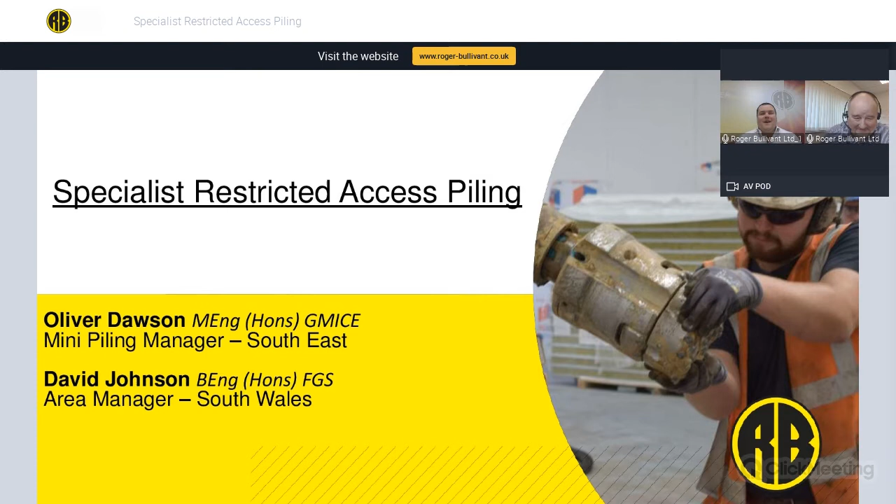So what we'll be talking about today, these are the topics: a little bit about our business, Odex piles, drill bar, jack down piles, slab underream, and then quite importantly, a question and answer session at the end.

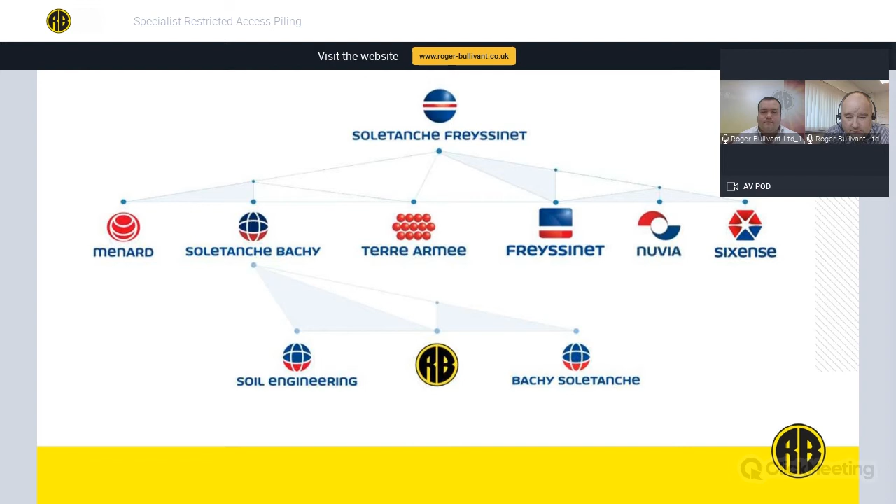Roger Bullivant ourselves, we operate out of 8 individual area offices throughout the country, and this gives us an advantage in that we've got local engineers with local knowledge, and that we've always got people available in your area. So if you need somebody to come out and have a look at your project and talk you through some things, which are the best options for your site, then we've got people available to do that.

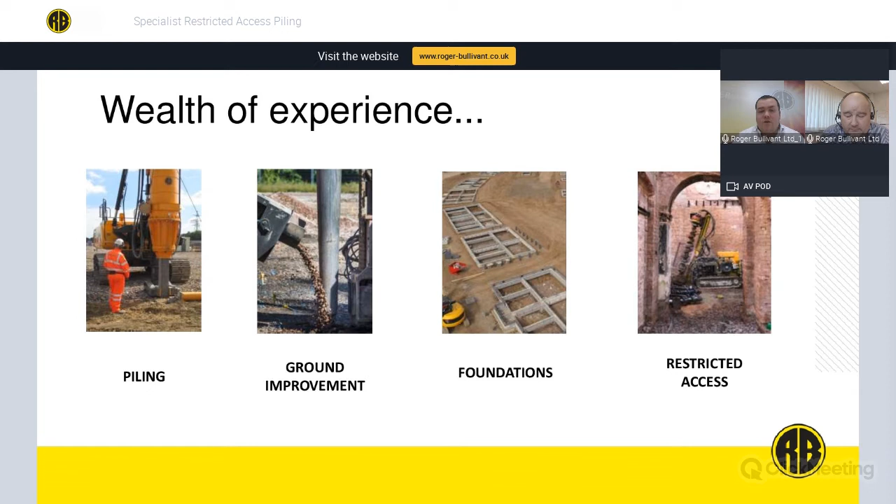And just some of the other techniques that we do, there are some webinars as well for these individual techniques: main fleet piling, driven precast, CFA, CHD piles, onto ground improvement, so vibro stone columns and dynamic compaction. Precast foundation systems to complement the piles that we put in the ground - we also have a precast system that can go on top to give you a full foundation solution. And onto restricted access piling, which is what we'll be discussing today and have been discussing in the previous two webinars, which is our smaller fleet of rigs for working in restricted headroom, restricted access.

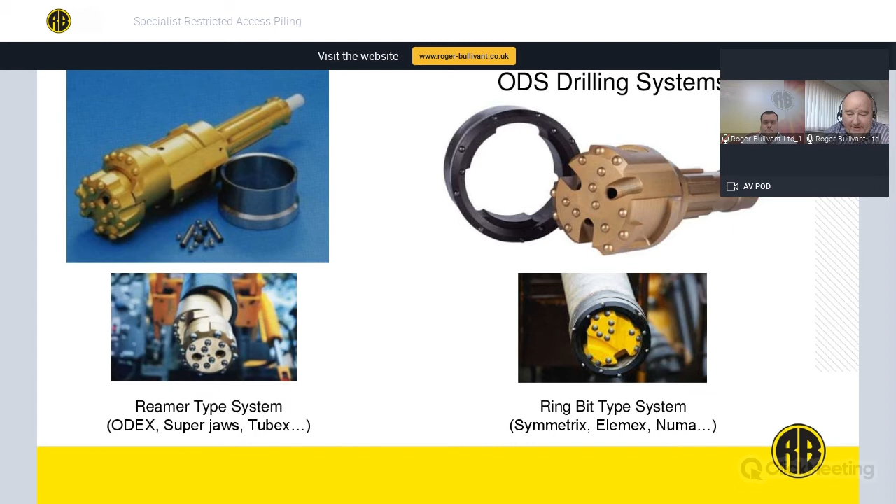But if we just advance forward, this is the basic installation of the Odex type pile, where we're taking a casing down behind the drilling system. So we drill into the ground and we rotate clockwise. We've got a hammer sitting behind the drilling system, and that will be giving the percussion to drill away at the ground, and the air flush clears the drill tip and brings the material back to the surface.

So we're drilling forwards, and once we've got into the rock and we've taken the casing down as far as we need to go, we then rotate the drill system backwards, which tucks in the over-reaming ring, and we can extract the whole lot back to the surface. We then go back down with a standard button bit and a DTH hammer, and we form a rock socket into the ground and fill that with concrete and with reinforcement. If the ground's wet, then we use standard tremie techniques, but essentially you're forming a pile socketed into the rock and cased through the overburden.

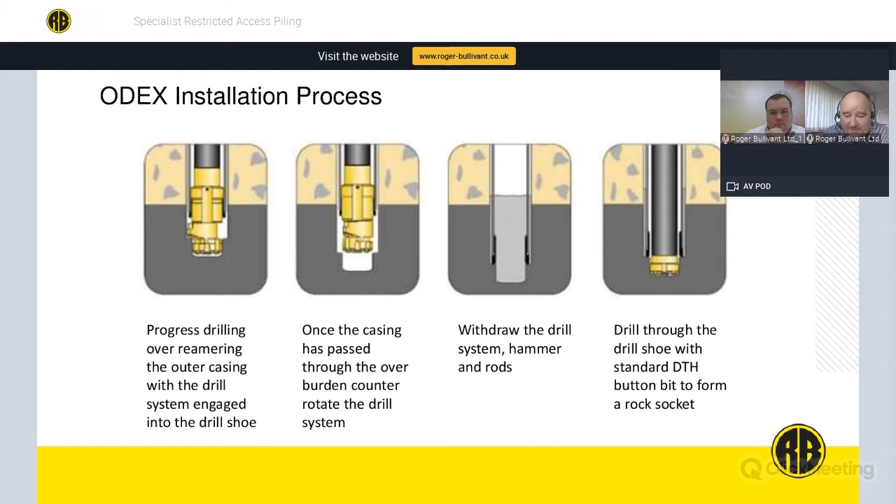This is just to show the type of machines that we use. Essentially, all you need to provide is rotation and a machine that has the capacity to lift the drill string back out again. So the deeper you go, the heavier the drill string, the bigger the machine you need.

This is a 6-inch Odex system with a mini rig, which will sit with a remote power pack. It's only got a 1 meter stroke, so it's quite slow to penetrate. It shows you that you don't actually need large machines if you're going to try and employ this technique in restricted access.

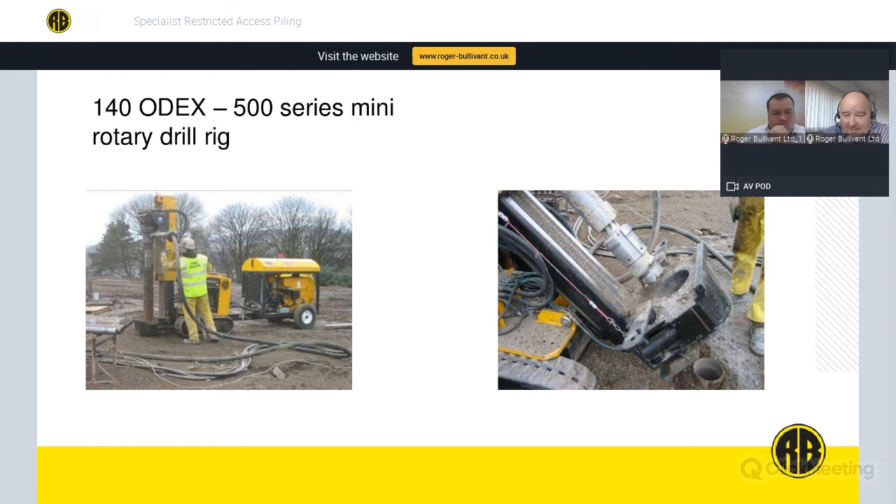Looking at the other type of system, Elemex is typical. Where I said before, the actual drilling system engages with the ring bit. So the ring bit and drilling system go down through the overburden into the rock, disengage, and come back out again. And you can see on that center photograph or the illustration, the ring bit which is left behind down the hole. They're several hundred pounds, so you could have a good specific reason to use this type of system.

And then once that's out, you go back down again, socket into the rock, and fill the hole with concrete and reinforcement. One of the benefits of the Elemex system is the way that it controls the airflow.

With the reaming system, the air tends to go into the ground itself, whereas with the ring bit system or the Elemex, it balances the airflow sufficiently that it cuts and it clears the face of the drill, but it's got a way of exiting from the face of the drill and back up inside the casing.

This is very important if you're drilling next to sensitive structures or anything where putting air into the ground might cause a problem. If you've got water-bearing sands, for example, you could cause liquefaction or disturbance to the ground. And mine workings is another example where you don't really want to be pumping a great deal of air into the ground if you're going to disturb ground gases and things like that. So there are subtle differences between the two, and we choose the right drilling system for the right ground.

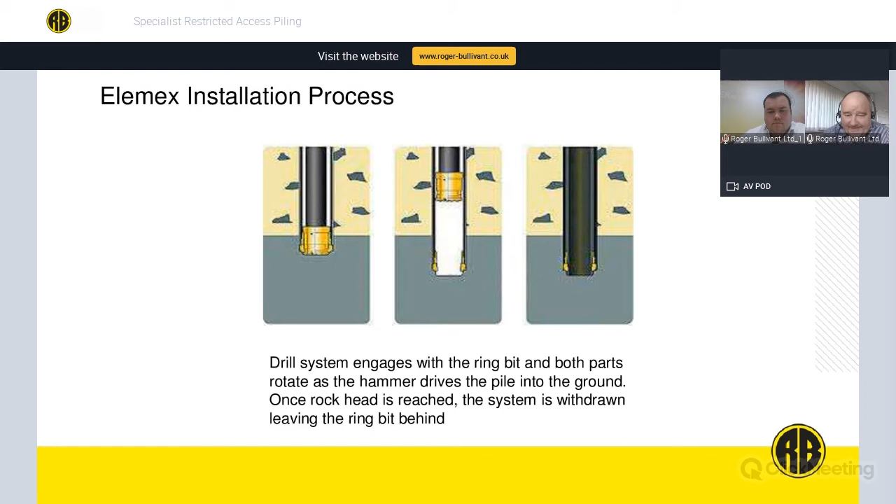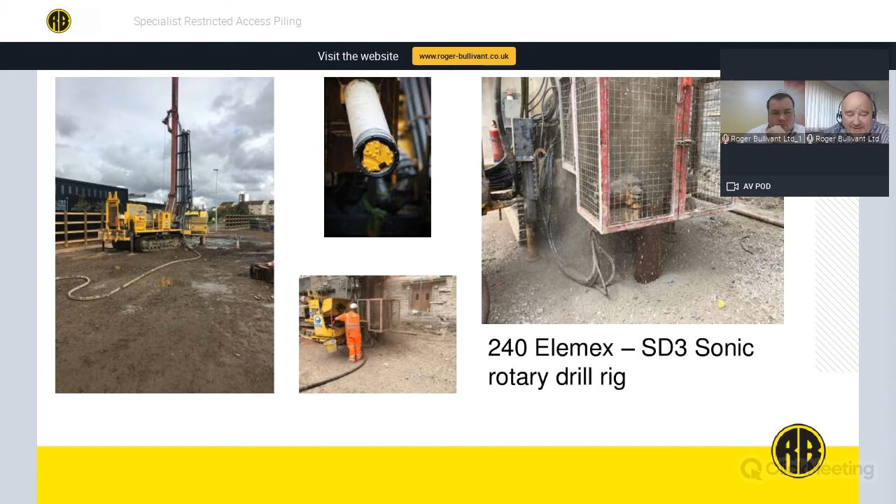Here's a little video.

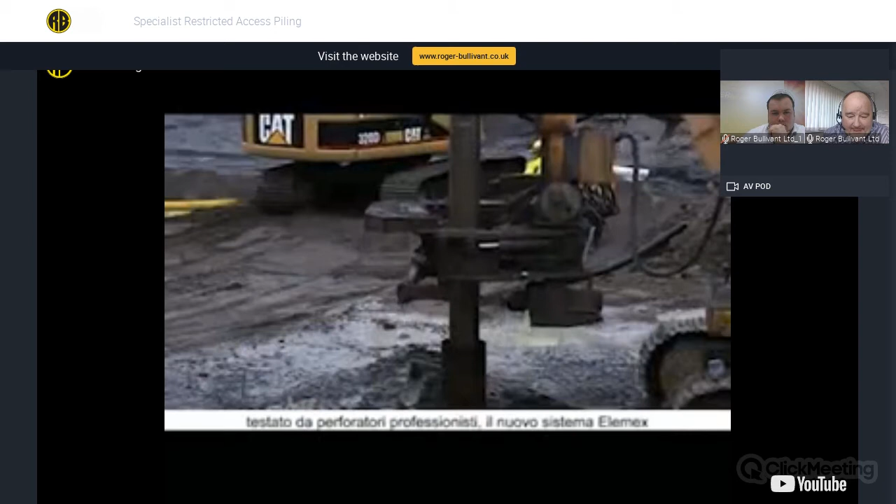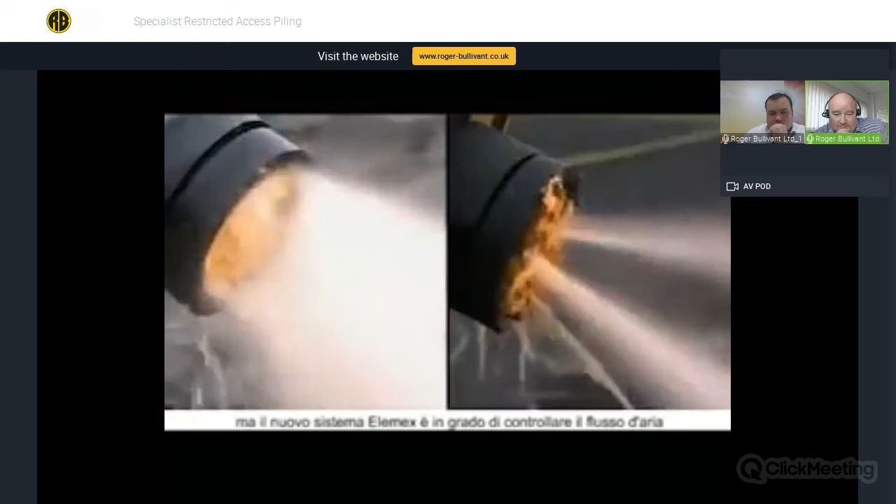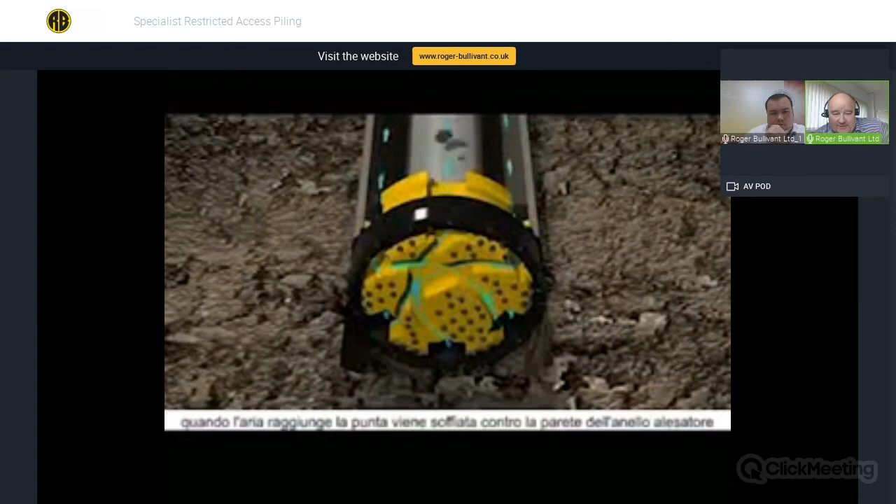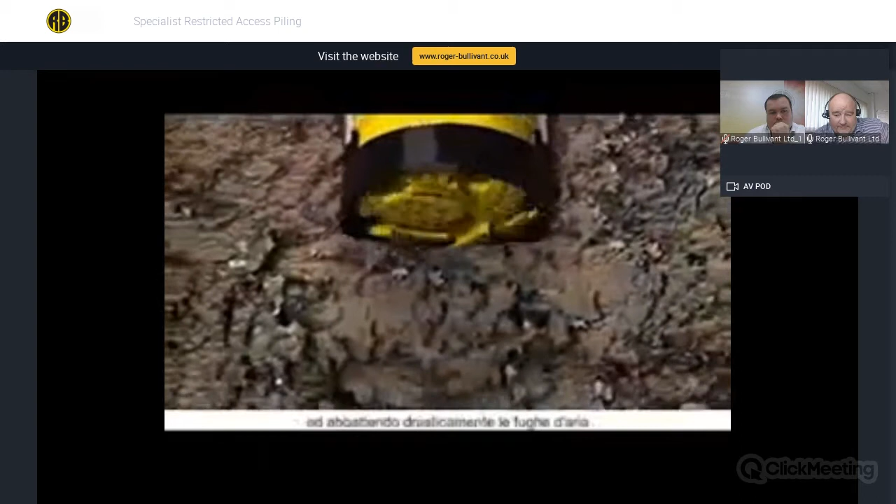Proven by seasoned drillers, the new Elemex system has revolutionized their way of working. Conventional down-the-hole drilling systems push compressed air straight into the ground. In clay, sand, or other sensitive ground conditions, this makes it hard to predict exactly where the air will go and how it will affect the surroundings. But with the new Elemex system controlling the airflow, the difference is obvious. It controls the airflow across the face of the drill bit. The redirection of the airflow is what makes the Elemex system unique. Once the air reaches the bit face, it's blown against the extended ring bit walls and is redirected to flow across the face. In this way, the air pressure is decreased just enough to allow an efficient flushing of the bit face without escaping to the surrounding ground.

Right, I think we're back again. Thank you, that was Odex piles, or drill and case piles.

Moving on, we've got a similar type of pile in that it will penetrate through hard ground and it involves percussive drilling. But this is what we call drill bar piles, where we don't need a casing to hold the side of the ground open. We're using a grout flush, and we're using that as a support fluid to keep the sides of the hole open.

Now, these have been around for a while, and they're called various different things. We call them drill bar piles, but they're often called self-drilled micro piles. It's the technique used for soil nails and rock bolts, or even anchor piles. Where you've got to be a little bit careful is they have got good tension capacity, but you have to look carefully at the code if you're going to start using them as British Standard or Eurocode anchors because of the double corrosion protection. So there are ways around it, but you've got to look at your specification for anchors before actually using them for that pure purpose.

Essentially what you've got is a long drill bit, your percussive hammer sits on the piling rig up above, and the drill string becomes the reinforcement of the pile. So you've got a continuously threaded bar with couplers, and it's a hollow bar. What we do is pump grout down through the center as we're hammering on the top, and that will flush the cuttings and the arisings back to the surface.

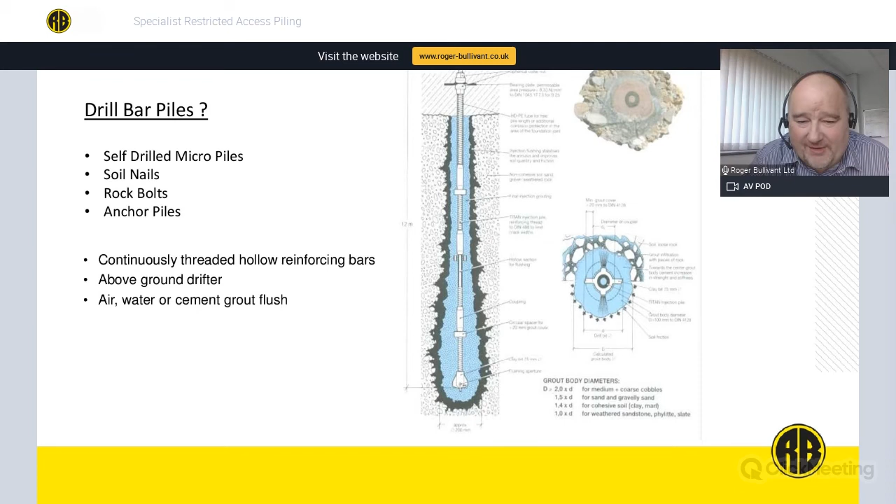You can mix grout with water and have a weaker grout, and in the right ground conditions, if you've got rock, you can introduce air. But essentially it's going to be grout or some sort of support fluid just to keep the hole open. The drill bit as well is a one-use drill bit, so you'll be careful in your selection of your drill bit because they're designed to go down the hole and just be left there.

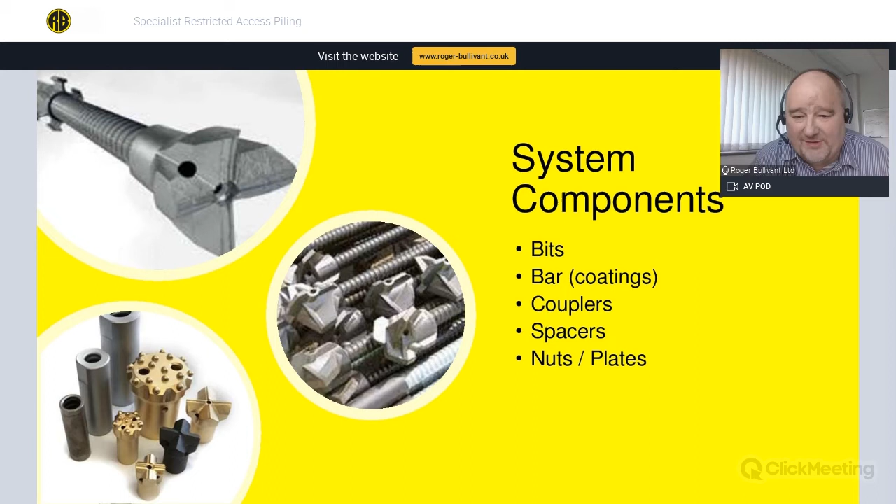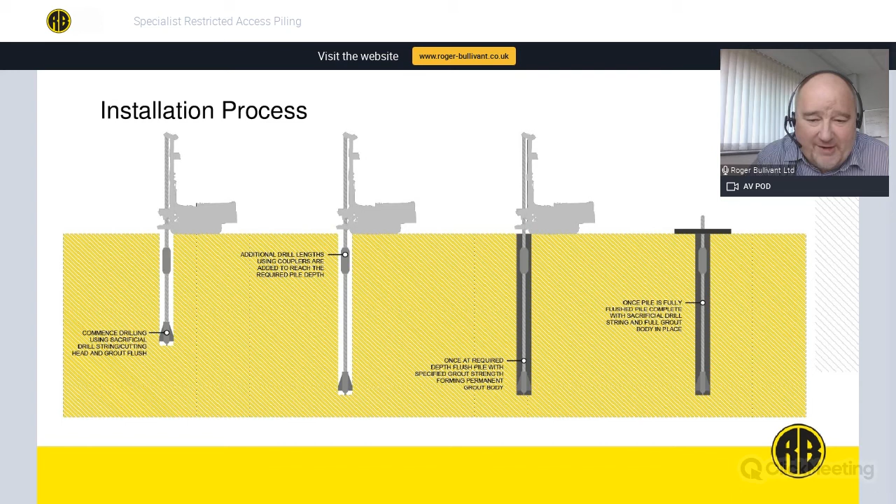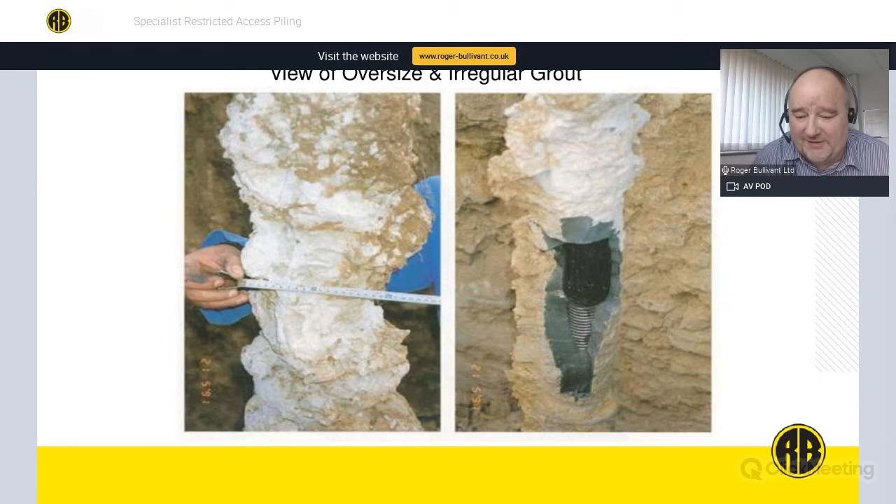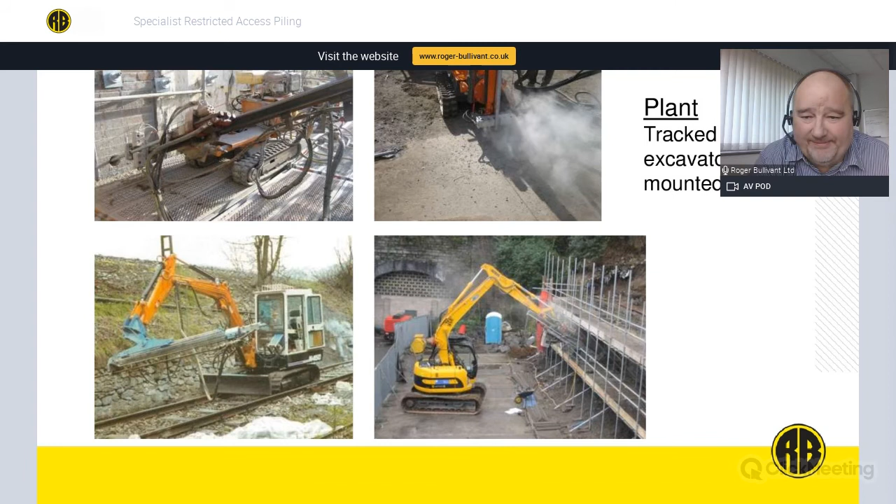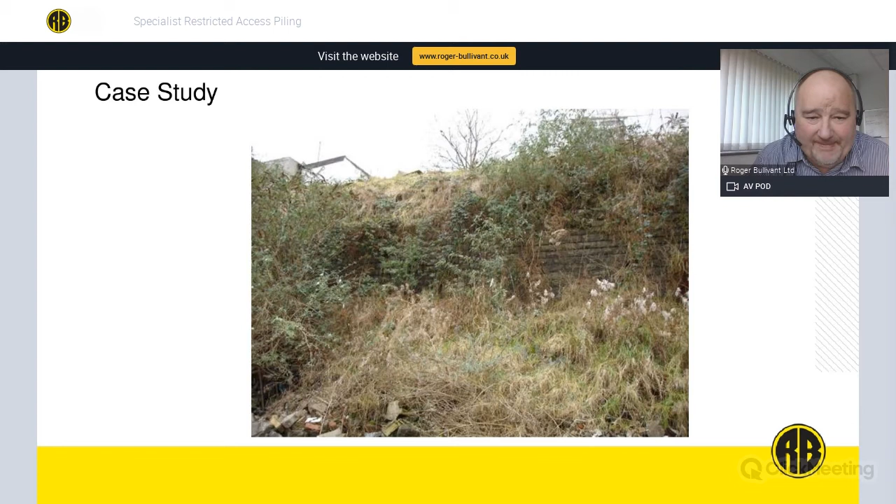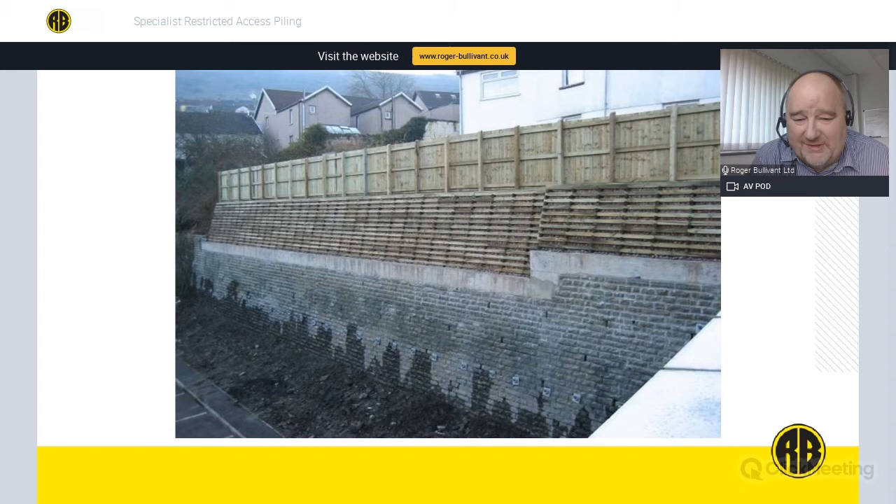And there's the finished job. So I was quite pleased with that - it came out really well. But it just gives you an example of the sort of things that we can put together. And in this sort of specialist, restricted world, it's more a case of presenting the challenges, and we tailor our systems to come up with solutions to people's problems.

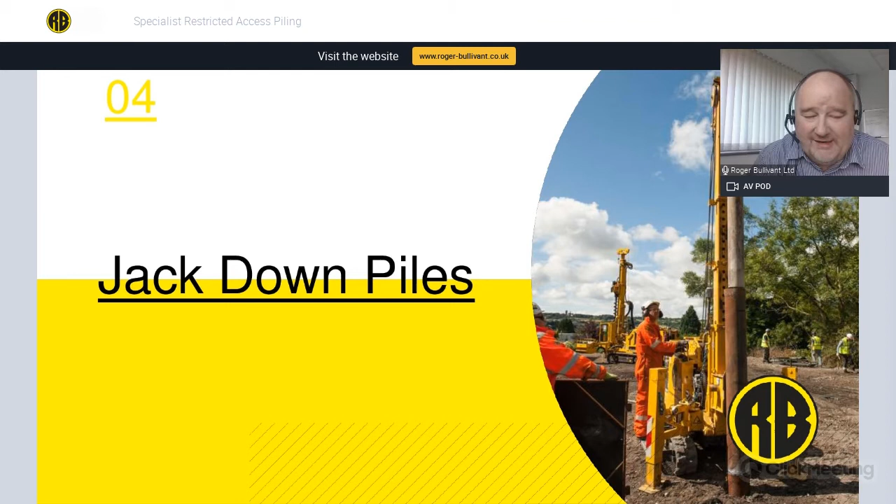Our third technique that we look at today is what we call jackdown piles. It's a relatively simple technique in that it involves pushing something into the ground, be it precast concrete or typically steel tubes, using a pair of hydraulic rams. It's completely vibration-free and silent, so we can use it inside buildings. We get very high capacities with these rams, up to 1,000 kilonewtons.

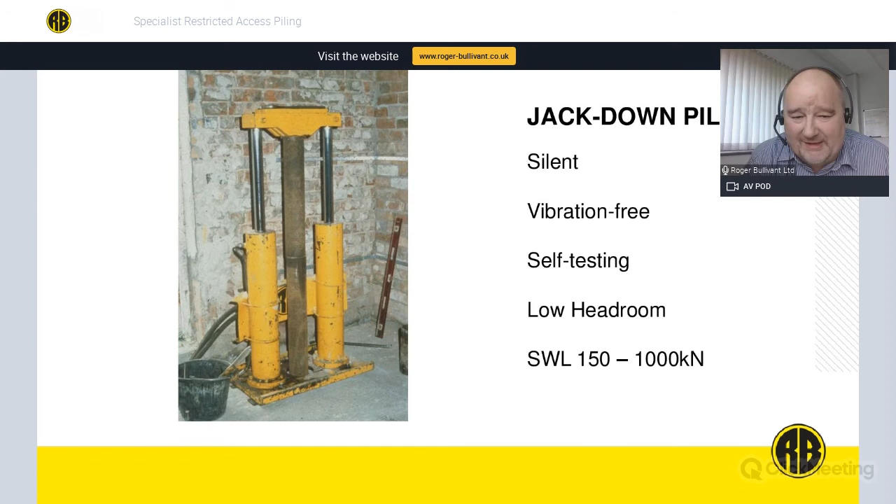And it's self-testing - we tend to use load cells. So as we're jacking the tubes into the ground, we'll introduce a load cell and we'll hold the load, a bit like a static load test, but not necessarily for quite so long. But we're proving the pile capacity as we're installing them.

One thing you've got to provide is a reaction. You can do that using water tanks, pallets of blocks, or typically on underpinning situations, we use the structure itself.

This is an example of an old historical structure where the front gable wall had moved away from the body of the building, and it needed underpinning but tying back in such a way that we couldn't use typical percussive piles, and we didn't want to undermine the foundations. So we went for a jack pile solution, which involved putting in a new slab and gave integrity to the building before we then installed the supports.

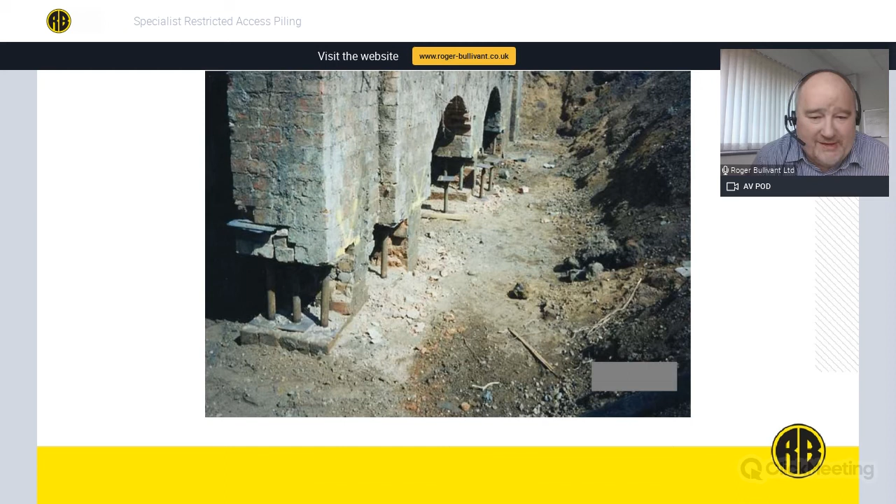We went in and needled into the walls, taking out the brickwork pockets, installing temporary supports, and then fixing reinforcement into the needle pockets. We fixed the slab and a downstand edge beam.

The edge beam on the jack pile system has to be reinforced upside down and the right way up, because as you're jacking, you're imposing forces and bending to the opposite way to what you have in your permanent condition. Now you'll see there are 3 steel tubes. They're tapered steel tubes, taped over at the top. They are to facilitate the jack piles after we've cast the slab itself.

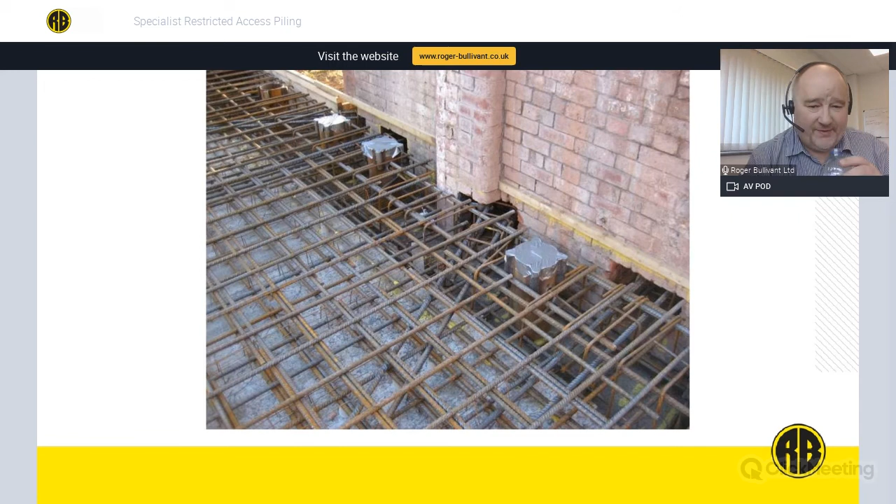Steel tubes come up through the reinforcement. We've got some couplers welded onto there, and they sit proud with the top of the concrete, so they sit above the reinforcement there.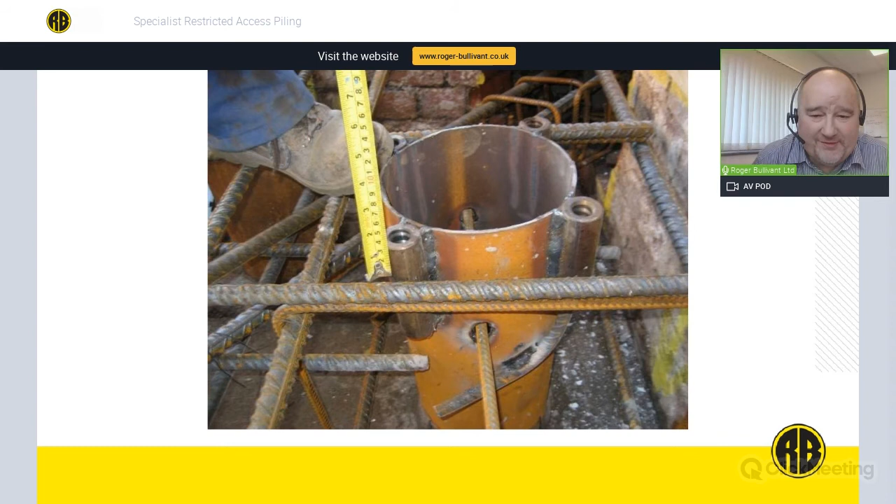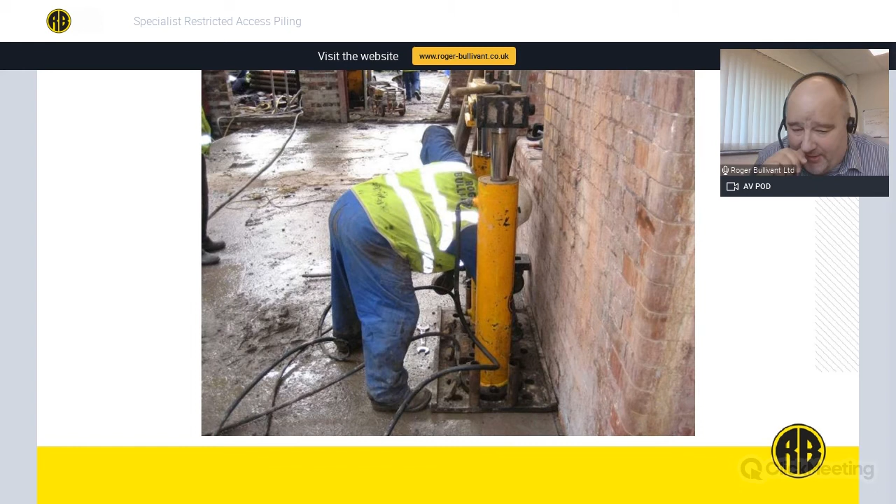The wall to the right is acting as kentledge to hold the whole system in place. Once we get down to depth and we've tested the load capacity, we fill the tubes full of concrete, and those tapered steel tubes then anchor into the slab.

There's a little case study here, final one for jack piling. This is in Hereford, if anybody knows it. It's an Edwardian facade on a building which actually encompasses a Tudor timber framed building within it. It's very odd, and it's built over the old city moat.

So there's the plaque on the outside. Now down in the basement, Barclays had a problem in that the vaulted old cellar was starting to collapse. They'd been repairing it over the years and it was continuing to creep. The ground was going down and the arch was springing. So there was quite a lot of dilapidation.

We had access problems in that the only way down there was downstairs behind the tellers. We couldn't have any vibration. Ventilation was an issue - it's quite sticky down there. So we had to come up with a bit of an innovative solution, and as you can see, the headroom was quite a challenge.

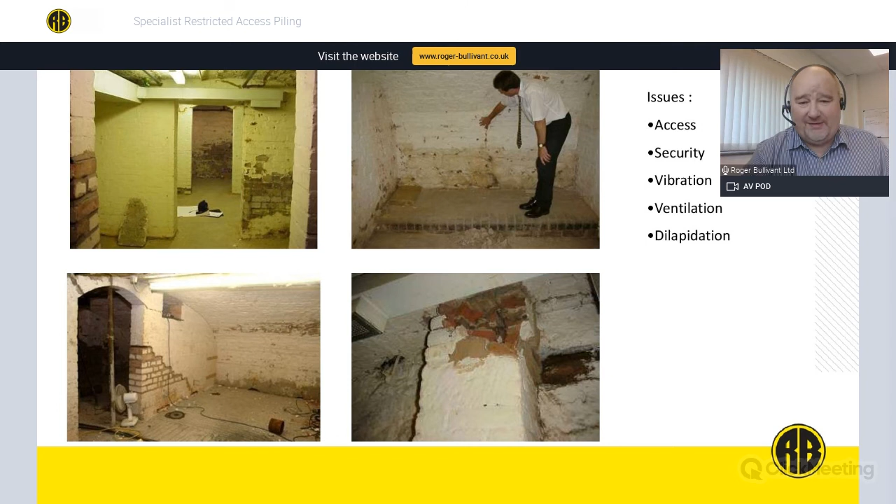What we came up with was a jack pile solution where we cored a hole from one of the upstairs lobbies down through into the basement. And that's how we got down the reinforcement and all the concrete for the slab.

And then we built ourselves a bespoke electric jack down rig, which was silent, no fumes, and that could pump 120 kilonewtons maximum load, using the building itself as the kentledge. The lowest part of that sprung arch was at 1200 mil, so we could only use very small strokes, sort of 6 inches at a time, to push the tubes in.

So we were using shims and pieces of steel roll sections just to facilitate the jacking. But that went really well and allowed us to support what potentially was quite a dangerous building.

Right, our final section today. This is basically a case study of something we've recently done in a brewery where we've got a warehouse where the client wanted to increase the loading on the floor by introducing a computerized racking system. The racking system is 40 meters tall and it's full of beer, so it's very heavy.

So the existing pile slab couldn't cater for the increased loads. The client didn't want to take the floor slab out and start again. He wanted a more cost-effective solution of upgrading and increasing the capacity of the floor slab.

Now, when you put piles in through a floor slab, conventionally, before you put the floor slab on, an efficient way is to put a pile cap on top to increase your shear perimeter, or to put a flared head. Now, what they wanted us to do, or the design for the new piled slab, was a 1300 millimeter diameter enlarged pile head, but we had to do that through a 400 millimeter cored hole. So we had to find a way of actually under-reaming under that slab.

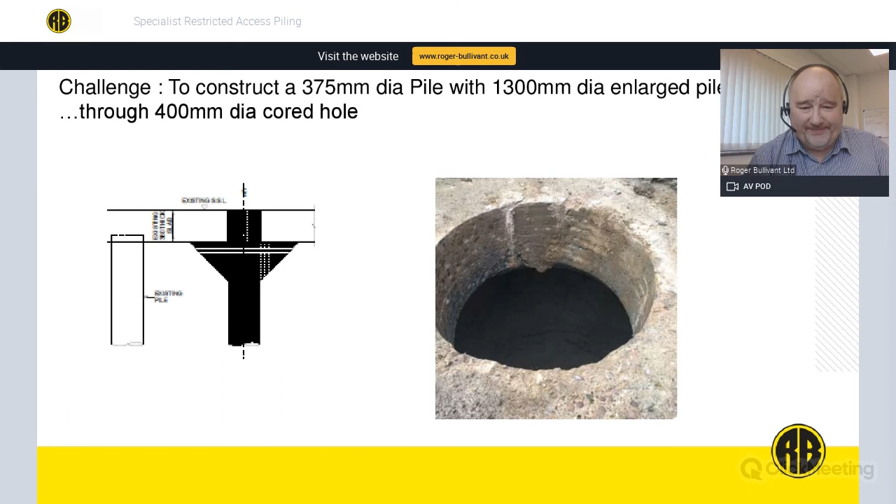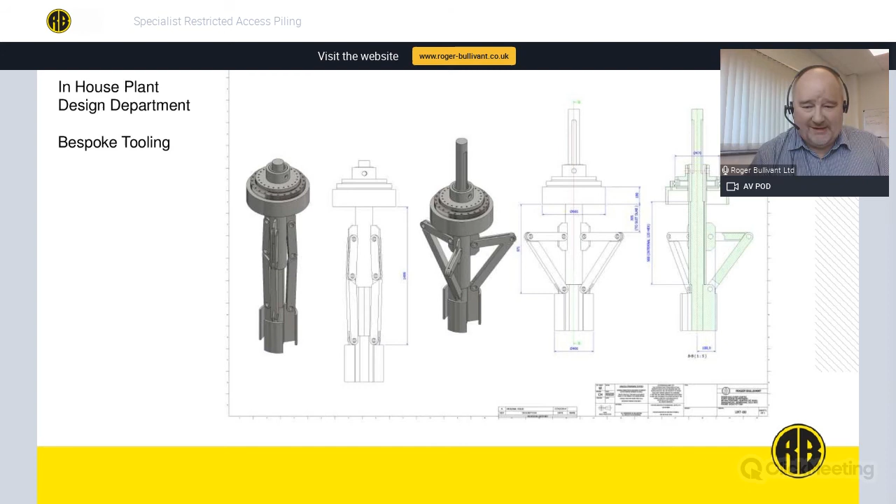What we did was we spoke to our in-house plant design department, who came up with some tooling. The technique we used was that we drilled a pilot hole down through the center of the cored hole, and then we introduced this tool which was fit within 25 millimeters of the cored hole. On the left there you can see when it was collapsed, and it basically acted like an upside down umbrella. So as we rotated, we lifted the arms and that cut away and formed the underream.

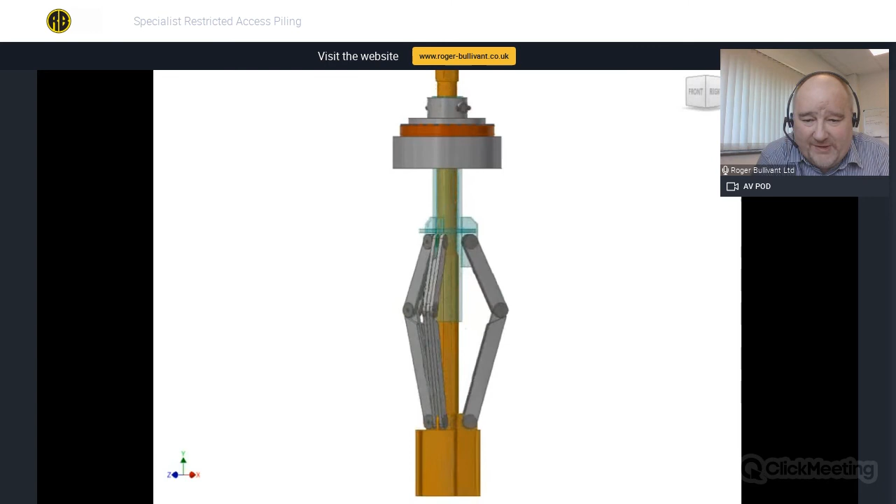Here's a little video just to show you an animation which we produced for the client. There we go. So you can see we had a pilot hole down which we dropped the collapsed under-reaming tool. The piece on the top there, which you can see, is a special bearing we manufactured so that we could attach it to a piling rig.

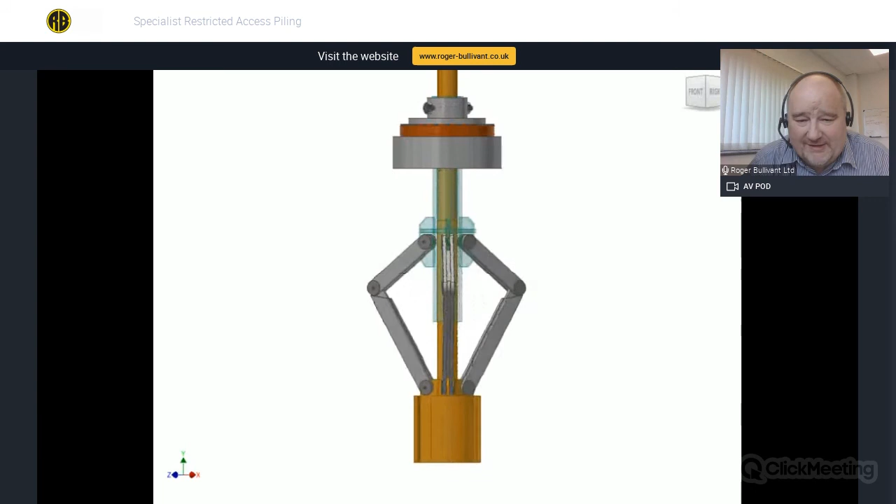The big steel ring we clamped into the bottom of the rig. We attached the center spindle onto the head of the piling rig so we could provide rotation, and we could lift the tool to make it cut as we rotated. So we were using a conventional piling rig and this tooling. And as it rotated and cut, the cuttings dropped down into the pre-bored hole. So we were catching all the cuttings and forming the under-reamed shape.

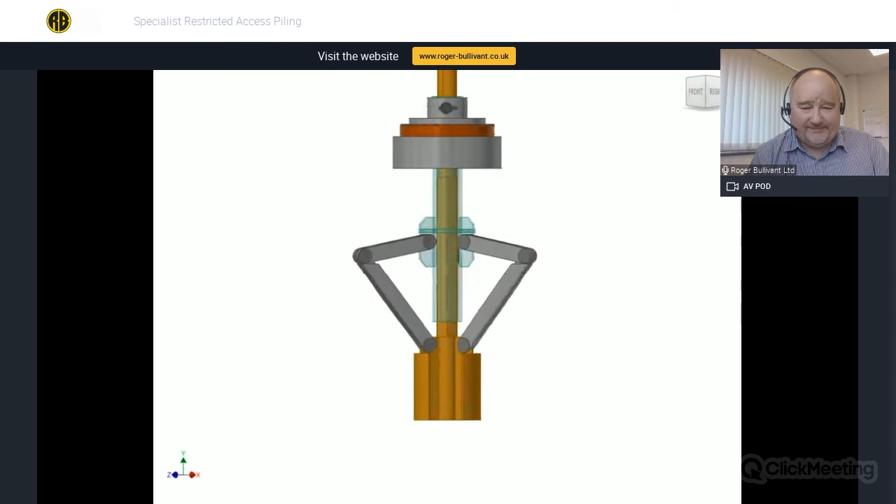We then took the cutting tool back out, lined the under-ream before we went down with a conventional CFA pile, and pulled the casing out to form the under-ream with concrete. So it all worked very well, 1,300 piles, and the client was well impressed.

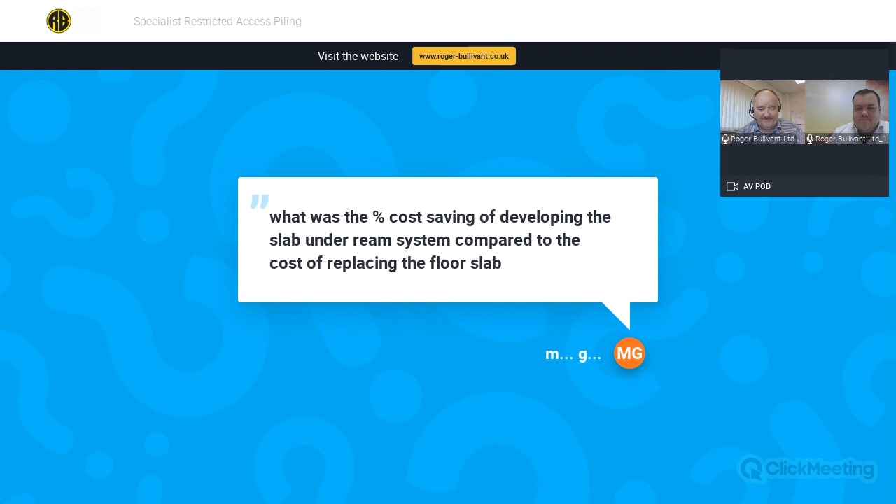Okay, thanks, Dave. Can you confirm if Odex piling is the most suitable technique for piles on a sloping high wall surrounding a former open cast mine? Yes, brilliant.

Particularly the ring bit system - it drills a nice straight hole, and it will cut into a high wall. We've done this many times. What you tend to find with a bored pile or with a driven pile is it will skip off a high wall - if anybody doesn't know what a high wall is, it's essentially the side of a quarry. The Odex piles or the drill and case piles will cut into it and core into it.

It'll also deal with any quarry waste. That's one of the problems with drilling quarries or piling in quarries - often they throw a load of rubbish in the bottom, large boulders, and traditional piles will go down and think they've hit the bedrock at the bottom of the quarry, whereas they're on some loose material which may cause long-term settlement. So yes, piling round quarries and high walls is ideally suited.

Okay, if you'd like to speak to someone about that, Claire, then please get in touch, and we'll perhaps come out and see it and discuss the project in more depth.